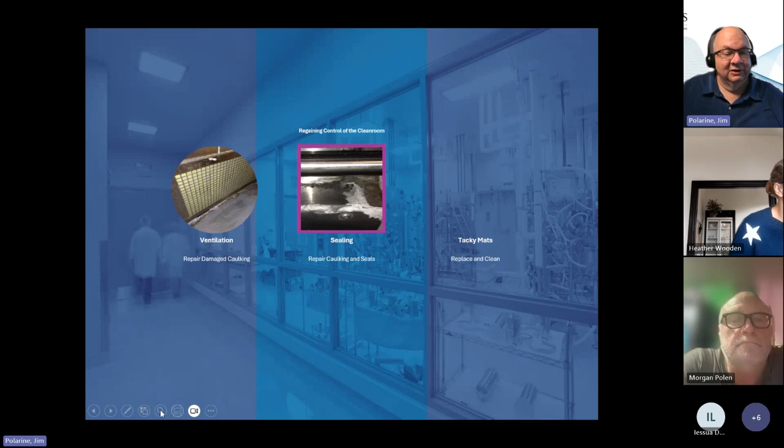So let me talk about, I've got a few slides here I wanted to show from recent issues that I've seen at different cleanroom sites in the industry. I just wanted to highlight some of these because I see these things often. Then I'll turn it back over to Heather, but I think Morgan will probably go next.

One of the things I've seen a lot in the industry is with the ventilation systems, when you've got the HEPA filters coming either down from the ceiling or in horizontally, a lot of times I've seen incorrect placement of the air returns. The other thing I've seen is they just don't ever seem to get cleaned correctly. As you can see here on this air return, it's got a lot of dust on it.

It's also got a lot of caulking on it here that is seeping out from underneath the ventilation vent. That's a problem in the industry because this caulking flaking off at the bottom will become a particulate issue in the cleanroom. The same is true with this dust gathering on top of it, which can potentially be a bioburden or particulate issue.

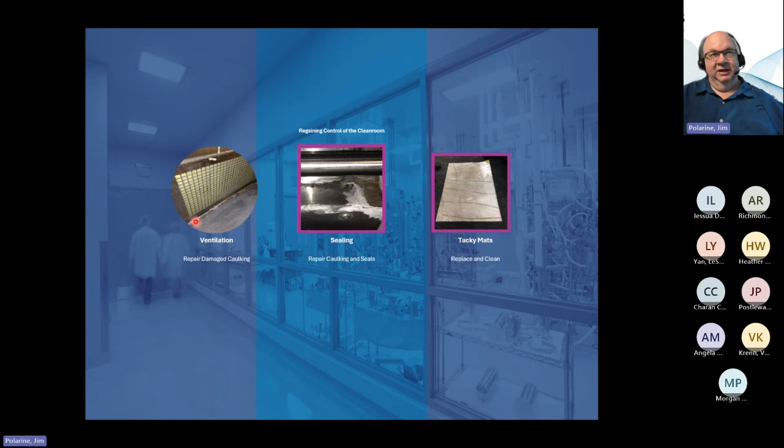So when you do have a shutdown, my recommendation would be to go in and fix the caulking problems and clean around these ventilation filters. If you don't, I think it can potentially become a source of particles in the room, maybe even a source of mold.

I've even seen in some instances in the cleanroom where routine maintenance doesn't take place. For example, in the lighting fixtures in the room, I'll actually see mold spore growth, black mold, growing in the fixtures because they don't routinely go in and replace the light bulbs or clean around that on a routine basis.

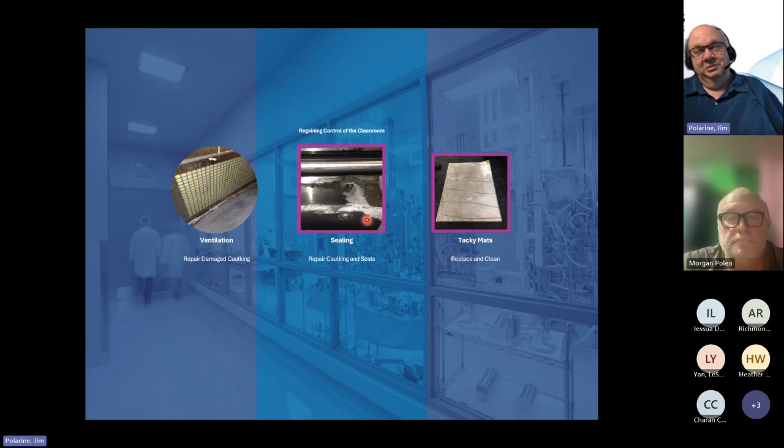Another thing I see is with the ceiling, when sealants are applied in the cleanroom. Here's an example where a sealant was applied to a ceiling tile, and as you can see, it basically looks like it's leaking from that area. It's not applied correctly, and thus it's creating a particle and potential bioburden hazard in the room. That's another problem that should be fixed when you do have a shutdown.

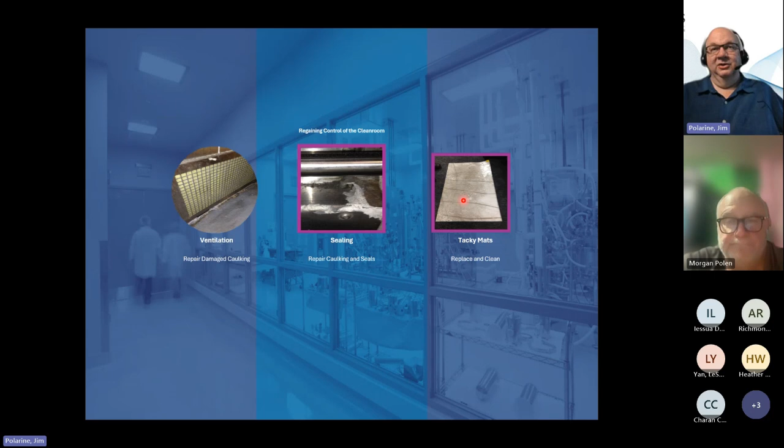A third thing I want to mention, and then I've got a couple more slides, is the tacky mats. When I go into a cleanroom site, and I'm sure Morgan has seen this too, a tacky mat looks dirty, and I ask how often do you guys clean your tacky mats, and I get like a deer in the headlights look, like what do you mean? Well, if you call Dycem or the tacky mat manufacturers, they're going to have a recommended frequency to clean these mats because as you can see here, they get very dirty.

Recently at a cell and gene therapy site in New England, an ATMP site, they had a big outbreak of Aspergillus mold. One of the potential root causes is they never clean the tacky mats. As you can see here, it's got a lot of particles and potential even bioburden on it. So that does need to be periodically cleaned.

And if these are the kind of tacky mats that you can just peel off and then you'll have a new one behind it, almost like a crack-and-peel disposable tacky mat, then you need to make sure you do that on some routine basis so that when it does get dirty, you're changing it out.

So any comments or questions about these things that I see periodically in the clean room?

I have a couple comments, Jim, if I can share or expand on what you were talking about, if that's all right. Sure, go ahead. You want me to pull down the slides if you want to bring something up? No, leave the slide up, leave the slide up if that's all right.

So like Jim was saying, talking about ventilation, air returns being in the right place or the wrong place, talking about design. One of the things I was going to add to the panel discussion was often the placement of air returns or HEPA filters themselves aren't considered as part of the design, often in terms of the movement, the flow of personnel or equipment, where you place the air returns. Sometimes I see a lot of times air returns will be blocked. People design a room and it's not really purpose built, so they put equipment in there as kind of an afterthought, and the air returns get blocked.

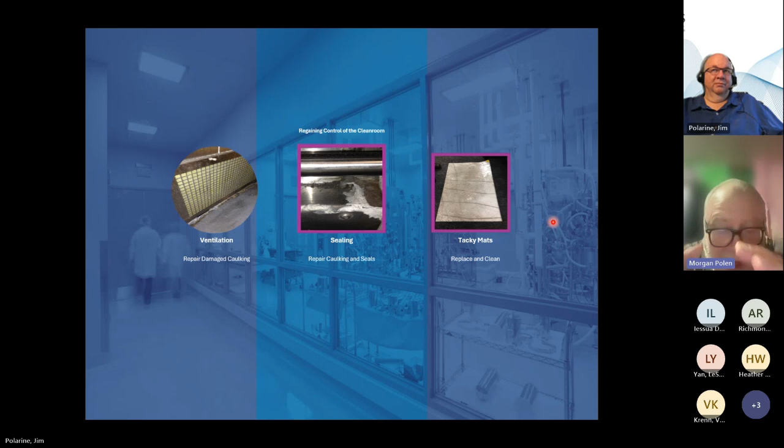If you have Dycem or polymeric flooring in a high traffic area with a lot of carts, scissor lifts, or forklifts, you might find you have to change it. The reason you would change the polymeric floor is if it loses its tackiness. If you clean it on a regular basis, based on traffic and usage, with the right materials, it can last for years. So what determines how often you'll replace it depends on those factors. I've had companies that have used them up to 10 years without replacing them, and they still retain the tackiness.

Does that help answer your question? Yes, thank you so much. Anybody have anything else before we move on?

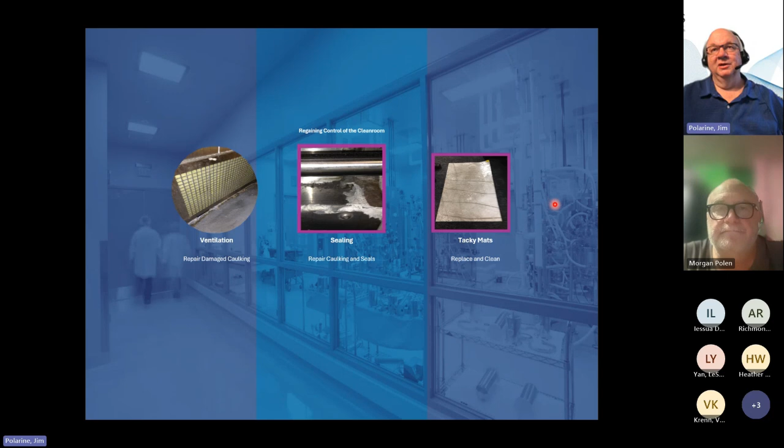All right, I'll go to the next slide. So these are three issues I see quite a bit when I go to different biopharma or medical device manufacturing sites. One is up in the ceiling area. I can't tell you how many times I've seen facilities where I look along the lattice structure up there, maybe around where they have the HEPA filters, and I'll see all this black in that area, and that is typically black mold.

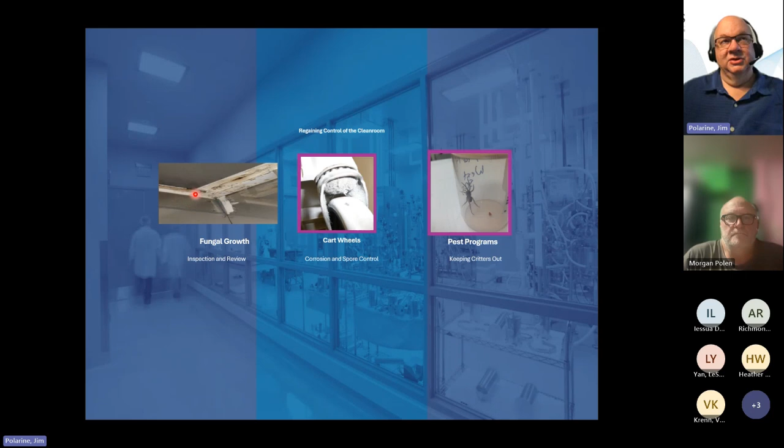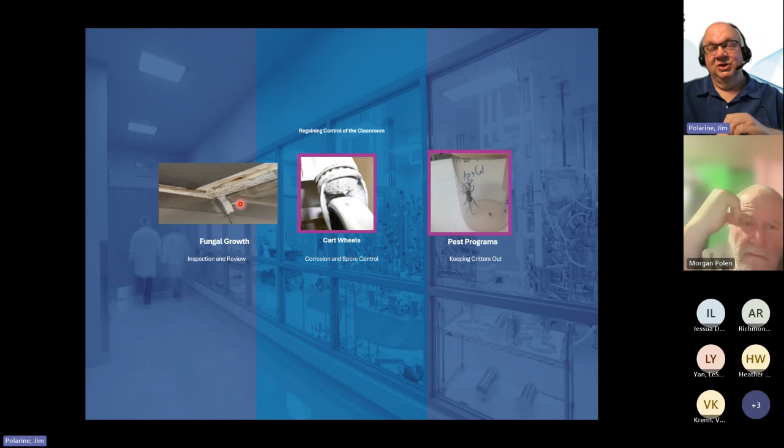That's Aspergillus, Stachybotrys, and it does need to be cleaned routinely. As part of your routine cleaning program, whether monthly or quarterly, you should be going up and cleaning around the ceiling and the joists. If you see mold growth, you may need to get up there and clean it, and if you can't get rid of it, you may need a mold remediator or even need to replace it. I've worked recently with a site where they had such a mold outbreak that they had to throw away furniture because they couldn't get rid of the penicillium from a water leak in the interstitial space above the ceiling.

Another thing here, and I'm sure Morgan and I can talk about this the rest of the day, are cart wheels. Anne Marie and I love to talk about cart wheels too. Whenever you're taking a cart, or say you've got a media tank on wheels, or even a mop bucket system on cart wheels, those wheels need to be cleaned periodically and decontaminated with a sporicide. When the wheel starts to look like this, with a breakdown of the caster and corrosion and buildup of residue, if you can't get the residue off with the cleaner or disinfectant and it's really corroding, you may need to replace the wheel and caster, or even the cart itself.

You really don't want a wheel like this, or a cart system like this, floating around the clean room on a routine basis. The other big thing I see a lot, and I'm sure Morgan will talk about this too, is with the new CCS, contamination control strategy, pushed out by the revision of Annex 1 in August of 2022 - one of the key things that's part of CCS is a pest control program.

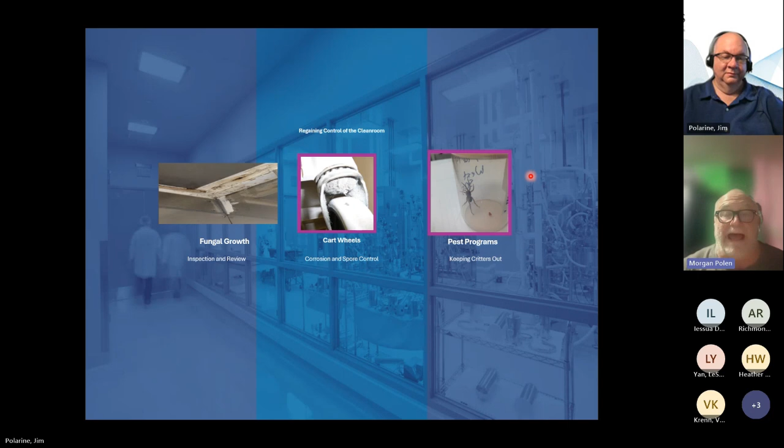And of course, pest control is really, really important. I got all kinds of stories. I did some work for NASA out of the White Sands Test Facility, and they have a problem where about every couple of months they've got rattlesnakes in their ISO 7 clean rooms. The pest control doesn't work for them because the snakes can flatten out and get between the cracks - it's always something to keep in check.

So yeah, really good slides. Anybody have any questions?

Anybody have any issues with pests at all? Feel free to go ahead and unmute if you need to.

One thing I want to mention, Morgan, going back to the cartwheels, just a couple things I've seen for ways people decontaminate them. When Anne-Marie teaches the cleaning disinfection course at IEST, she puts a sporicidal wipe on the floor and takes the wheel across it from one classification to the other. I've seen that technique employed. I've also seen operators spray the wheel 360 degrees or wipe it with a sporicidal wipe - that's probably okay. And I've even seen a site up in Pennsylvania where they have troughs in the clean room, and the wheels sit in the trough in the pass-through for 15 to 20 minutes, immersed in sporicide, before they bring it into a classified area.

I worked with an electronics company that would remove the cart wheels on a yearly basis, ultrasonicate them, and reinstall them. That removes all the particles. Again, they weren't concerned with fungal contamination, but the wheels were clean. One thing to look at - I do a lot of contamination investigations, and one of the things I always look for as part of the investigation is the shape of the wheels on the floor.

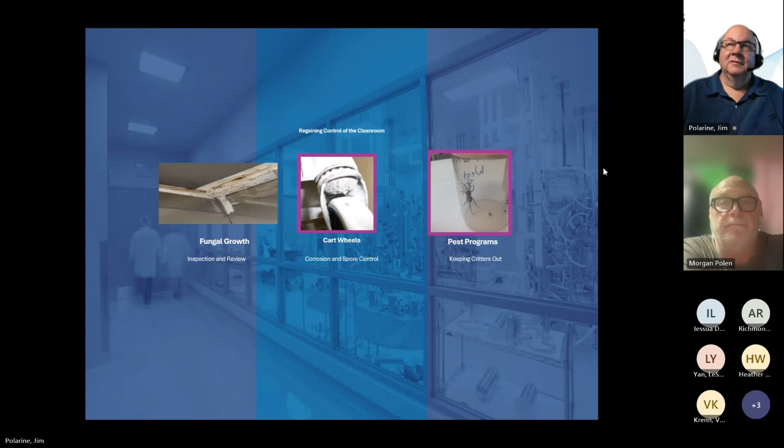Good points. All right, I just have a couple more slides here. Anybody have any questions or comments before I move on? No? All right, let me continue.

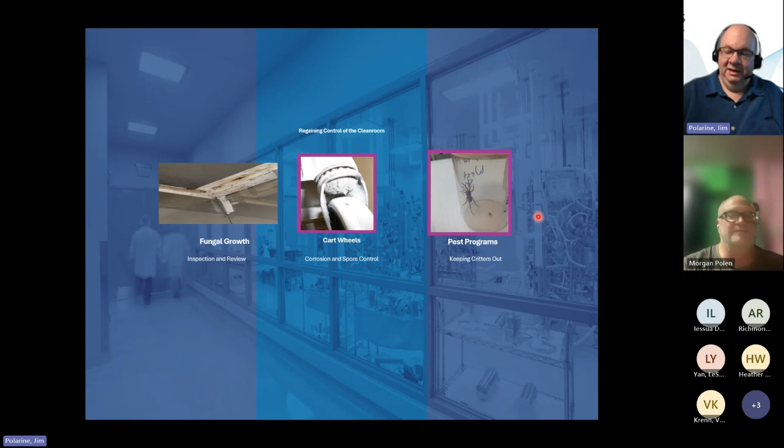So this is a case study from Austria, and this was at the beginning of the year. This is where I mentioned they had a big mold issue because of a leak from the technical area. In the box in yellow is where we're concerned here in the clean room, because this is the room that was affected the most by the mold contamination. Here we had a cutting instrument where they're making patches that go onto people when they're having operations on the skin - so this is the medical device they're making here.

Over in this section here, they do some testing, and there's a lot of furniture, chairs, and tables, most of which after this leak had to basically be thrown out because of the mold concentrations.

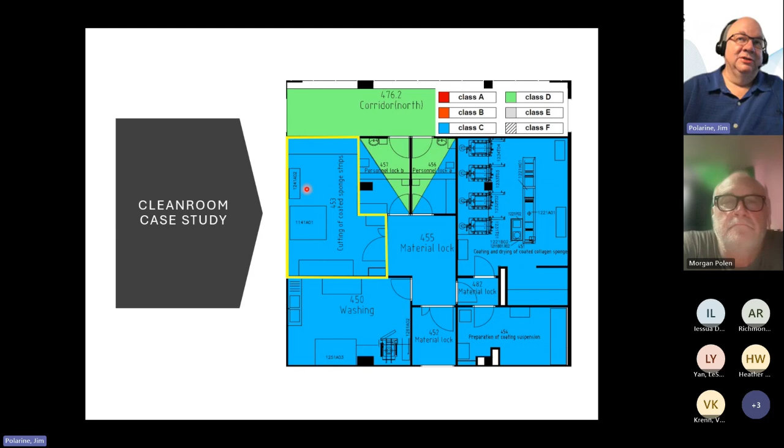In the technical area above the clean room, when clean rooms get to be around 20 years old, you start to have more and more issues from a manufacturing and technical perspective. So the issue was up above the clean room over a weekend - they had a valve on a pipe above the clean room that broke, and it put about 2 to 3 inches of water from the ceiling into the room.

So you had all these ceiling tiles that have inside each of them basically a red or yellow insulation material, and it all got wet as well. We basically flooded the room with water, which is a great source for mold. And then we had water up in this interstitial space, the technical area above the clean room.

One of the things we did recommend - here's kind of up above that area with all the piping - we recommended going into this area after the leak was sealed and after the pipe was sealed, and doing a VHP cycle, cordoning off the area and using VHP in here. We thought that may help reduce the risk of another mold contamination.

But one of the things I see a lot, and Morgan can speak to this, is people don't go up into these technical areas and periodically check things to see - do we have a bad pipe in the area? Do we have a bad connection? What is the risk level of a pipe breaking?

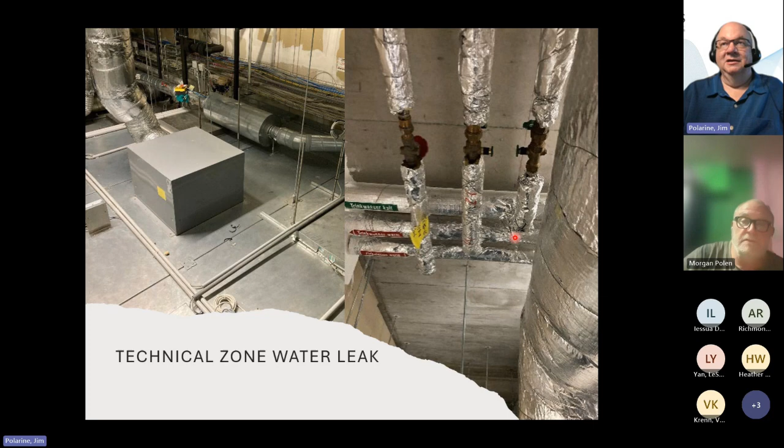Well, I'm going to go ahead and stop here, Morgan. I want to make sure to give you time. I have one more on mold. Oh, go ahead, why don't you go through it? Well, I've got to find it real quick. So why don't you go ahead and start?

Yeah, all right, cool. So I didn't have any slides necessarily prepared, but I definitely have case histories. And to kind of expand a little bit on what Jim was saying - things not to do - the topic of this is clean room design, things not to do in your clean room. And a couple things, number one thing, and it's a pet peeve of mine, it's a very common thing I like to talk about.

Do not put air returns in the ceiling. Okay, there are exceptions to that, depending on the type of facility, but generally most clean rooms - in fact, I might have a slide - most clean rooms, you don't want to do it. It's just a bad design.

The reason it's a bad design is we typically like to pump clean air in at the top and suck out dirty air at the bottom. That's why we have low wall returns. And the advantage of that aspect is particles - the particles that generally would be carrying microbes are going to be larger, right? And large particles do not flow well in air. It's an issue with particle counting, an issue with removing and cleaning up our rooms.

It's also an issue, a difference between US GMP and international GMP when talking about larger particles. And putting air returns in the ceiling can create short circuits, where air, instead of flowing and mixing with the room in non-unidirectional flow rooms, short circuits and we have less effective mixing. I've seen this countless times. In addition to that, it has been flagged by the FDA.

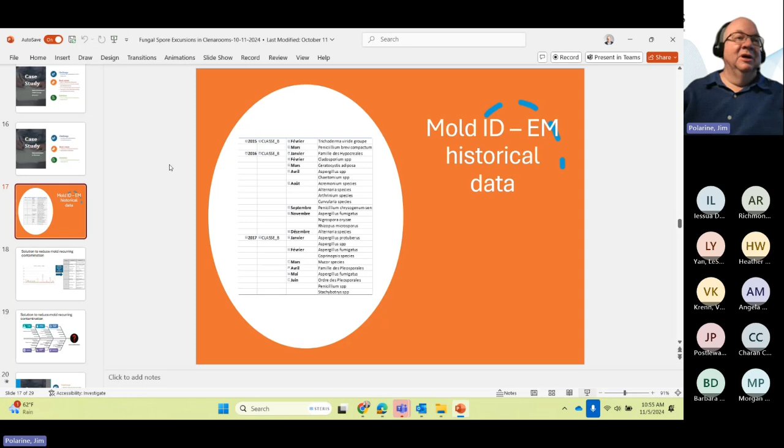Oh, tornado again. Hopefully everybody can see my slides. Was that a double tornado or is that just one tornado? I mean, it looked like it. Yeah, no, it was what do you call it, it was twin EF4 tornadoes up in Nebraska. So that would highly be regarded as not a good day.

Yeah, all right, so this is the EM data. I was brought into a site right at the end of the pandemic where they had a lot of site contamination from mold. It was an ATMP, a cell and gene therapy clean room site up in New England, and it was fairly new.

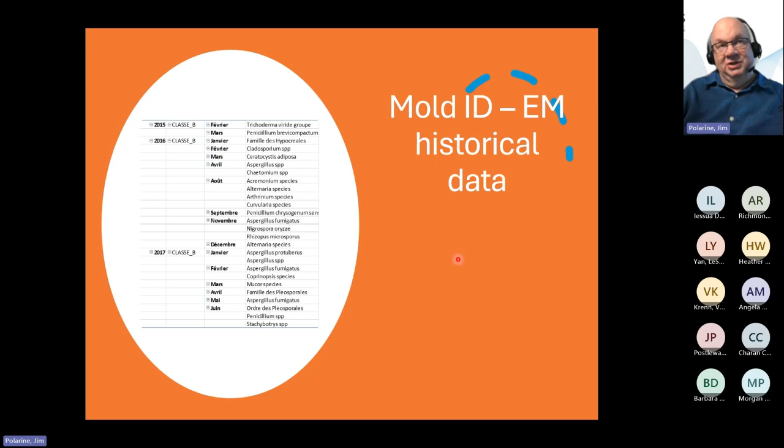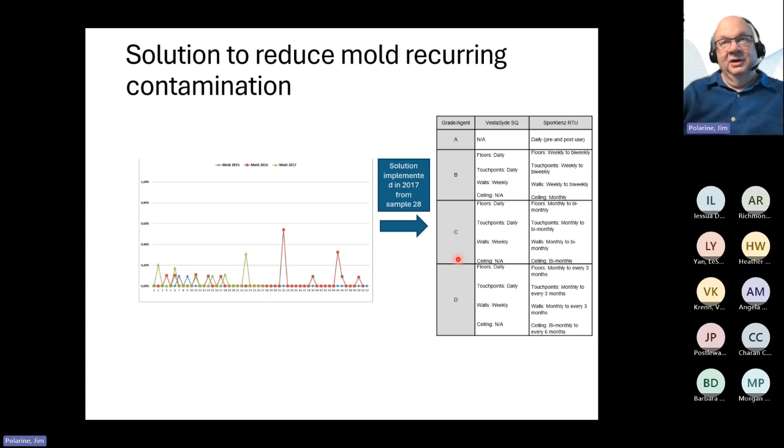When they showed me the hits they've had, which are up here on the slide, they had a lot of aspergillus, especially in their BSC hood, which is where they do the manipulation of the cells that go back into either a single patient's body or multiple patients, whether it's allogeneic or autologous cell and gene therapy. So we took a look at the data over time, and they were consistently exceeding alert and action limits with the mold hits in the room.

So I came in and wanted to take a closer look at this with them, and I was actually there with a consultant colleague of mine from the industry. One of the things I noticed right off the bat is going back to our tacky mat example: the tacky mats were completely black, had never been changed or cleaned. That brings back the example that Morgan and I were talking about, where you should contact Dycem or the tacky mat manufacturer. They will have a cleaning process, and you really do need to do that on a routine basis. Otherwise, your tacky mat's not going to have a very long half-life.

The other thing was the mop heads they were using to clean and disinfect the floors were all pitch black, so they were loaded up with either mold or bioburden, and certainly you shouldn't be mopping the floors with black water. That's something I see when I go to McDonald's, because that's not really cleaning anything. The water they were using for rinsing and residue removal was water from the sink, so tap water. They had the wrong dilution of disinfectant and sporicide they were using in the clean room. And the only thing they were using to decontaminate the BSC hood was 70% isopropanol, which has limited efficacy against mold.

So there were at least somewhere between 5 and 10 factors that we felt they need to really do increased investigations on to find the possible root cause of all that mold I just showed you.